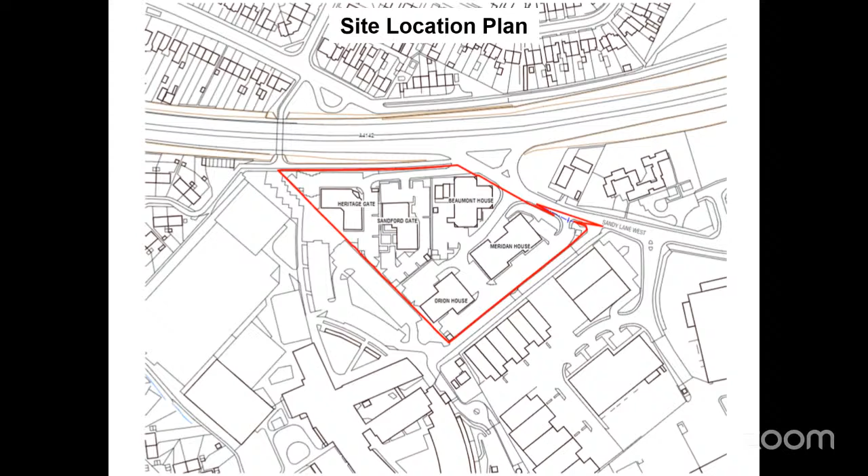The application proposes to demolish the existing buildings and erect 3 four-storey laboratory and office buildings, varying in height from 18 metres to 22 metres. Within the ground floor of one of the lab buildings, a dedicated learning lab would be tailored to the needs of local school children. A single-storey pavilion building at 4 metres in height would provide a flexible space with servery and toilets that has the potential to offer space for community workshops and events, public meetings, staff collaboration, and informal breakout space. One 3-storey demountable multi-storey car park would front Sandy Lane West and vary in height, reaching a maximum of 22 metres, including mechanical plant screen. The proposal would deliver a gross internal area of 20,730 square metres.

The multi-storey car park would be accessed by car via a partial 2-way eastern entry point off Sandy Lane West and would accommodate 299 car parking bays, with 4 accessible bays provided externally to the rear of the pavilion building. 8 visitor spaces would be provided on site. The multi-storey car park would also accommodate 280 cycle parking spaces, with 50 spaces located externally throughout the site and 15 electric scooter spaces adjacent to the external cycle parking. The multi-storey car park would also house a bike repair area, water tanks, and plant room at ground floor.

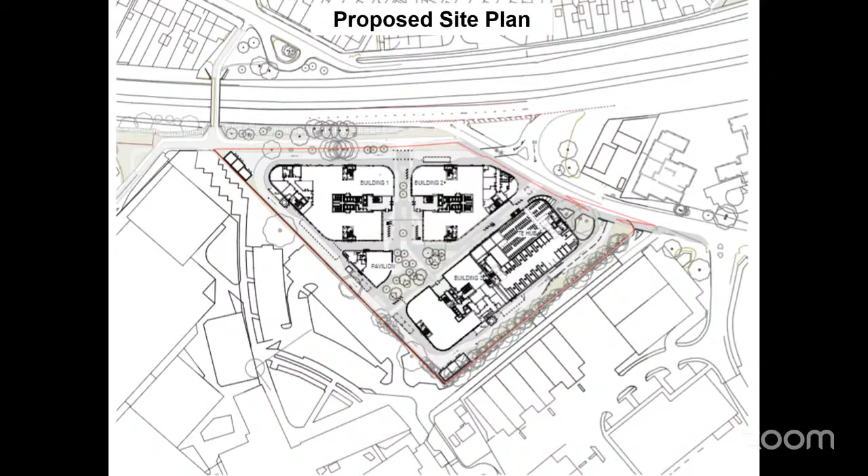The applicants would carry out improvement works and resurface and widen the cycle and pedestrian lane along Sandy Lane West and enhance lighting and widen the underpass where possible. Double yellow lines would be extended along Sandy Lane West to help avoid unauthorised parking, and 2 road humps would be installed to reduce vehicle speeds.

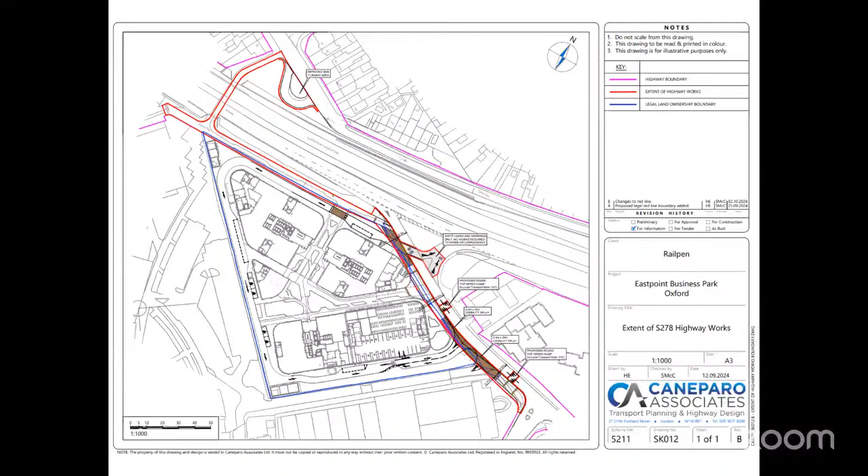In order to reinstate the 5A bus service and enhance the site's sustainability, the applicant would carry out works to bring the bus turnaround area on Long Lane back into use. These works include the removal of existing bollards, curb realignment to allow a double-decker bus to turn, resurfacing and installation of street lighting. Details of these works would be secured via a 278 agreement with the Highways Authority.

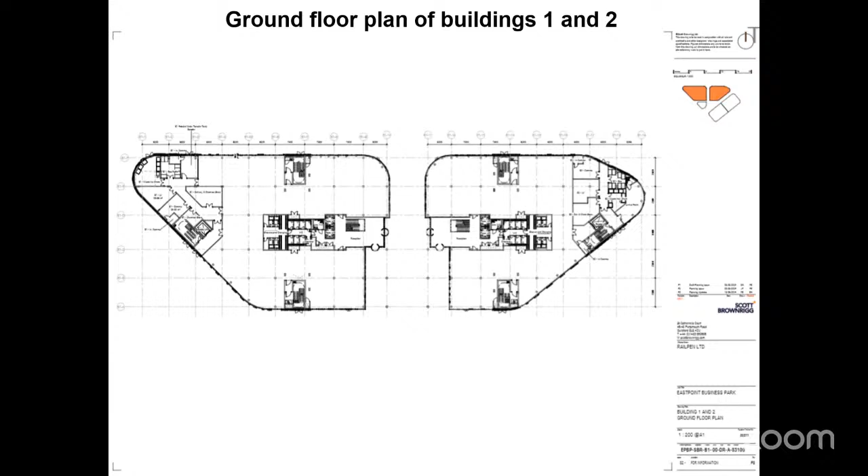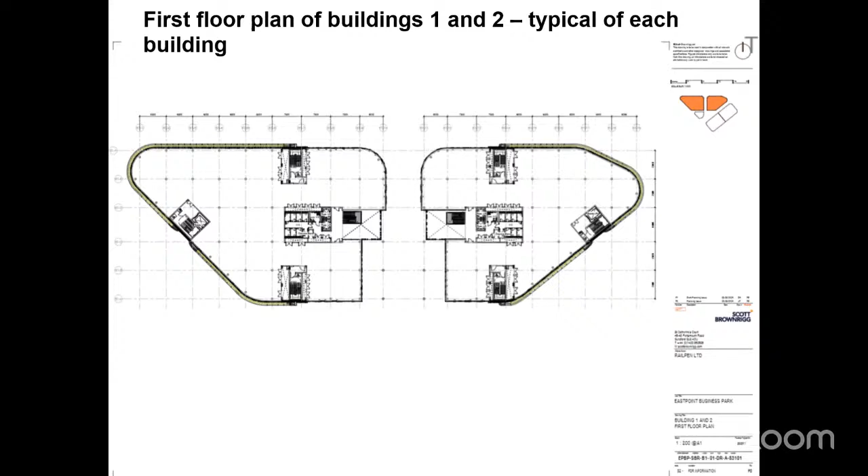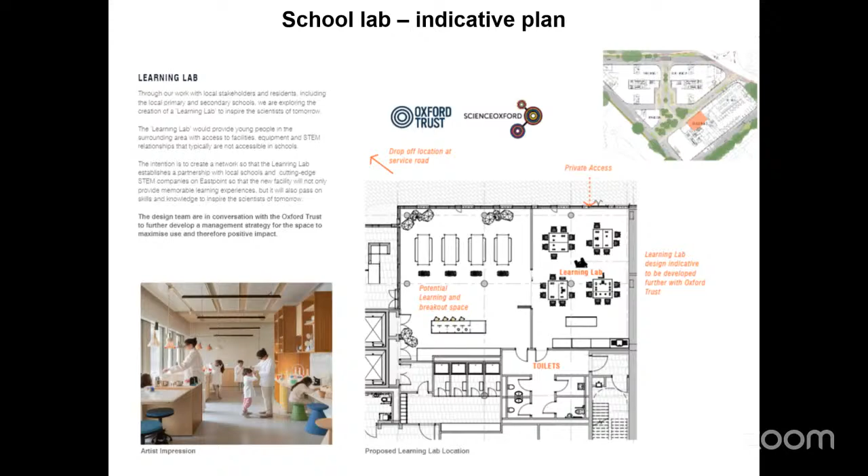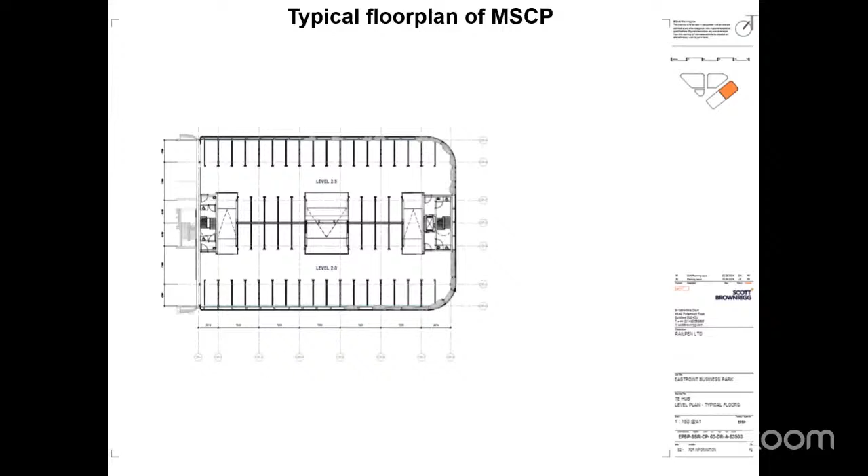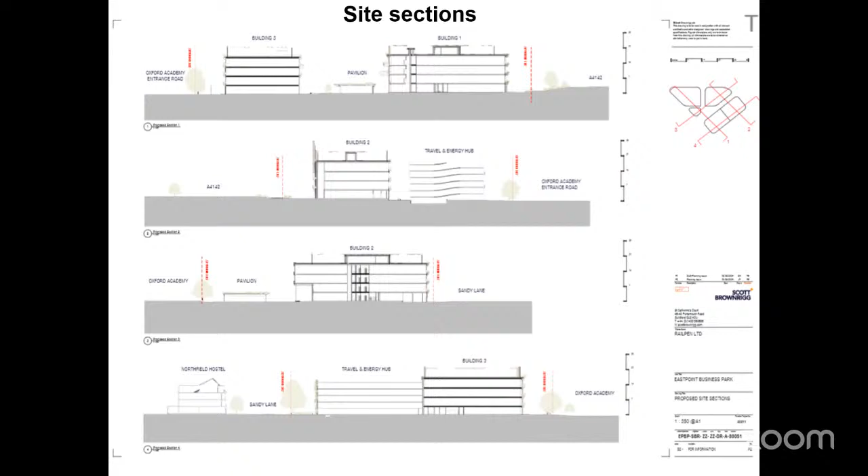This slide shows the site sections, illustrating the variance in height throughout the site. Care was taken during the pre-application process to ensure that the amenity of future Northfield Hostel residents is not impacted. Northfield Hostel is just here. And as such, the design was amended to increase the setback from Sandy Lane West and partially decrease the height of the multi-storey car park.

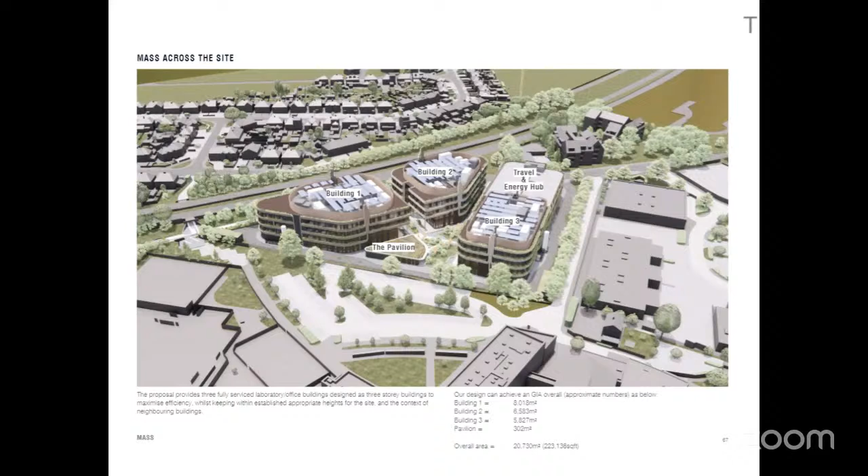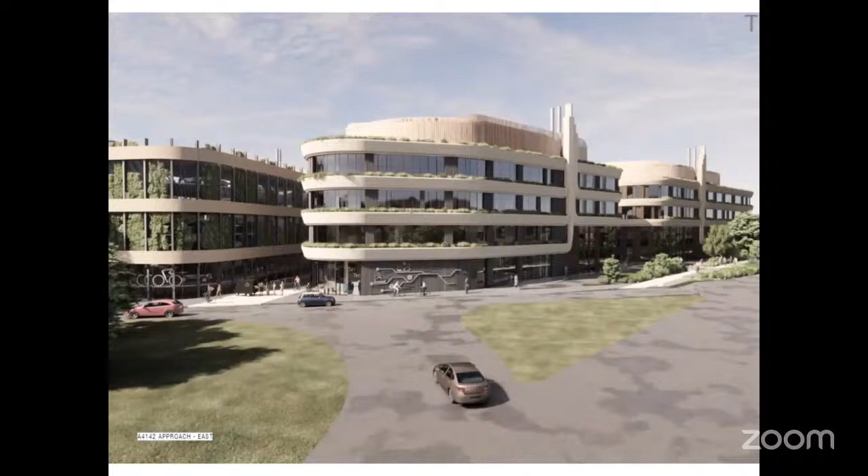The development is formed of separate buildings, which helps to break up the mass and allows permeability through the site for tenants and visitors, and enables the development to feel open rather than defensive, which is something officers and the applicant team worked hard to avoid during the pre-application process. The buildings are characterised by horizontal banding and curved corners, with the horizontal banding's significant depth enabling planting. This facade planting would help soften the appearance of the buildings, as well as enhancing the site's ecology.

The form of the flues appear as a continuation of the horizontal banding across the building, which results in a cohesive design and also works well with the curved corners of the building. Integrating the flues into the elevation design is always encouraged by officers, and it gives the lab building a strong narrative and celebrates the building's use, helping to create an identity for this new development.

However, the development would still be visible and appear as a large urban form of development, eroding the open character of the conservation area. However, accounting for the fact that the development would only be visible from part of the conservation area, the impact is limited, and officers consider the resultant harm to be a low level of less than substantial. A low level of less than substantial harm would also be caused to the significance of St George's at 31 Cowley Road, which is Grade 2 listed, and Dormercroft, which is also Grade 2 listed, as the proposal would go some way to eroding the character of the listed building settings in the same way that it would to the setting of the conservation area, in that it is less open.

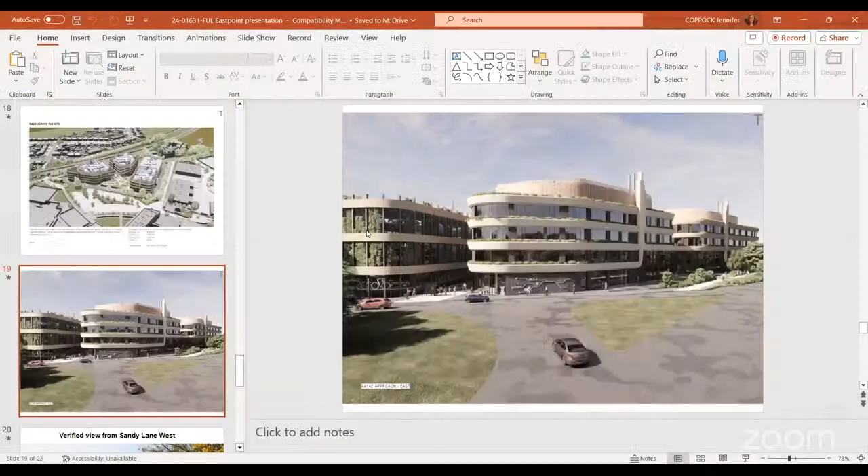We'll now move on to the next item, which is the Odeon Cinema. And again, that is Jennifer to present. Thank you. Okay, thank you, Chair. So I have one verbal update for this one as well before I start my presentation.

Earlier today, Thames Water removed its requirement to restrict occupation until sewage treatment works upgrades have been carried out. This is because the current capacity of the treatment works is considered suitable to accept the flows from the development of this size, taking into account the net additional floor space.

So the application site is located on the north side of George Street and is occupied almost in its entirety by a purpose-built 1930s cinema, currently occupied by Odeon. It's bounded to the east by St George's Place and to the north by Gloucester Green. To the west, the site adjoins the old fire station. Surrounding use classes include retail, restaurants and cafes at ground floor level, with residential and offices within the upper levels of 3 and 4 storeys.

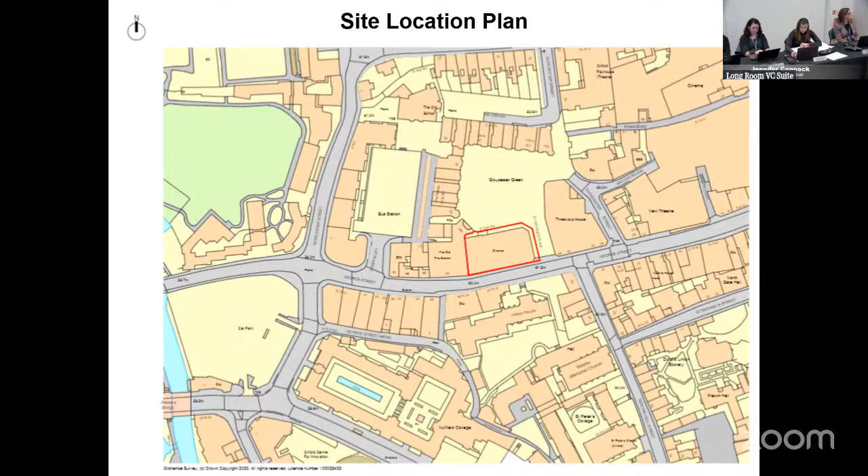The Gloucester Green bus station lies to the northwest of the application site. The site forms part of a secondary shopping frontage within the city's primary shopping area. The site also sits within the West End and Osney Mead area of change. The application proposes to demolish the existing cinema and erect a 6-storey plus basement apart hotel with a gross internal area of 6,050 square metres.

External cycle stores for the apart hotel staff and community space staff and visitors would be located to the rear of the building, fronting Gloucester Green. An external bin store would be located along the Gloucester Green frontage also. The existing substation and enclosure would remain in situ, also along this frontage. The proposal includes a seating area within the public realm, which extends around the northern and eastern elevations of the proposed building.

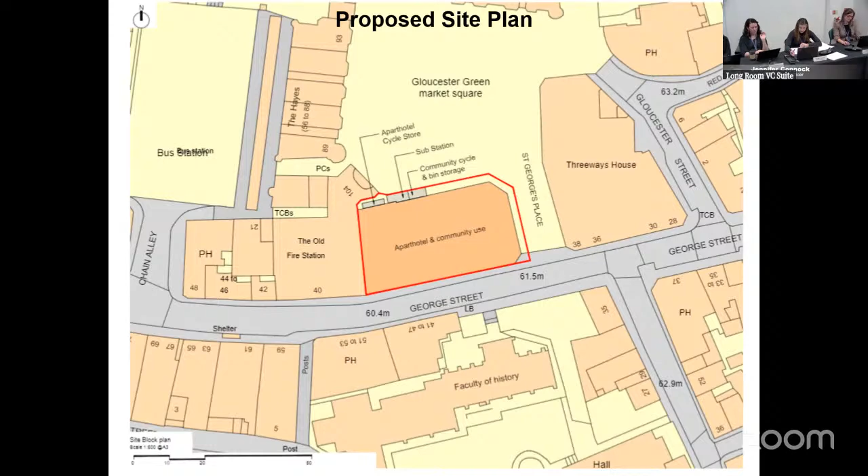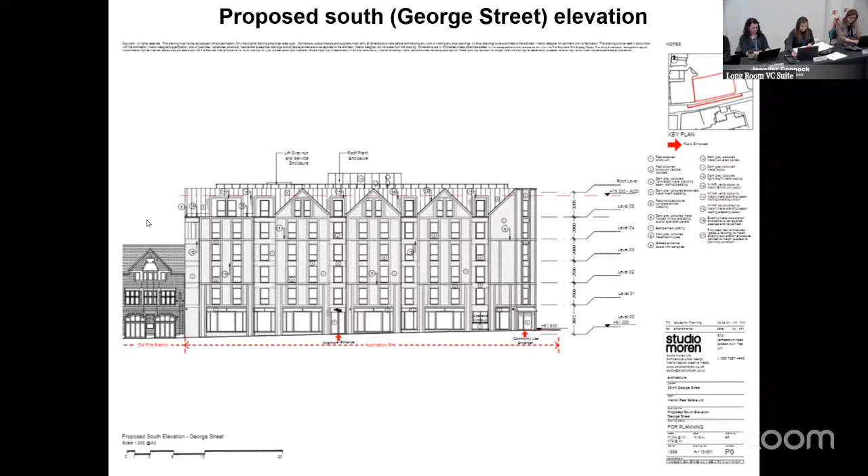The coffee kiosk hatch onto St George's Place would mitigate losing the existing building entrance along the eastern elevation, with the hatch having the potential to promote use of the improved public realm. The second entrance into the community space would be located along Gloucester Green, which is very positive, as it would further promote use of this space and enhance the public realm, as this elevation is currently blank, presenting very much as a back of house. Dormer windows have been used to add verticality to this elevation, much like the gables do along the south elevation.

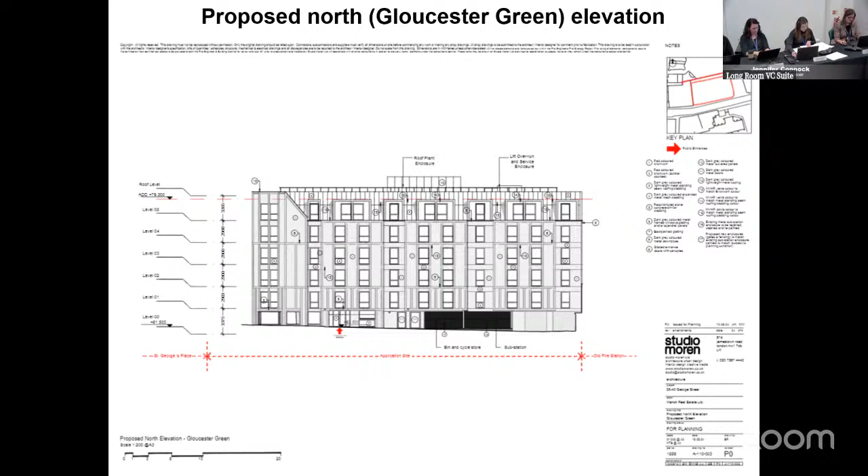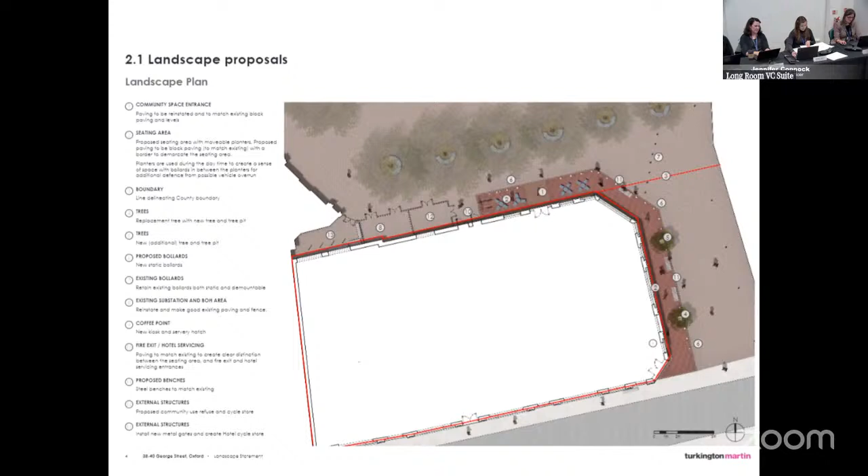Thank you, Jennifer. Now I've got two speakers down to speak in favour. If you could come forward, and if you're happy to divide your time up so that it's 5 minutes altogether, it doesn't have to be 2.5 minutes each, but as long as it doesn't exceed 5 minutes. You could use the mic, that's right, yeah.

Thank you. That's fine. I'm Andrew Heselton. I'm the development manager at Marick Real Estate. We're excited to contribute to the regeneration of this important site in the city. Our proposals have been developed with input and engagement with the local authority and stakeholders such as Highways, Historic England, Oxford Preservation Trust and the Civic Society. We've closely engaged with the surrounding property owners, local businesses and residents.

On multiple occasions, we presented our scheme at market stalls in Gloucester Green, plus holding a public exhibition at the old fire station. Additionally, there's been social media engagement, publications and stakeholder meetings, both before and during planning. This is just the start of our journey in community engagement and communications, which will continue through to completion. Just a bit about Staycity, which is a 20-year-old award-winning international hotel brand headquartered in Dublin. This scheme will be the first apart hotel in Oxford.

Staycity's approach is about the guest experience. The Staycity Wilde brand apart hotel differentiates its offering from a typical hotel, offering the best of both worlds by combining the comforts of home with the services of a hotel. Apart hotels are particularly popular with business travellers, tourists and families who appreciate having a home-like environment while they're away. Having the cooking facilities in their rooms offers guests a desired versatility and an alternative to the Airbnb offering. There is limited food and beverage offering in the Staycity Cafe, and this helps to drive local revenue to

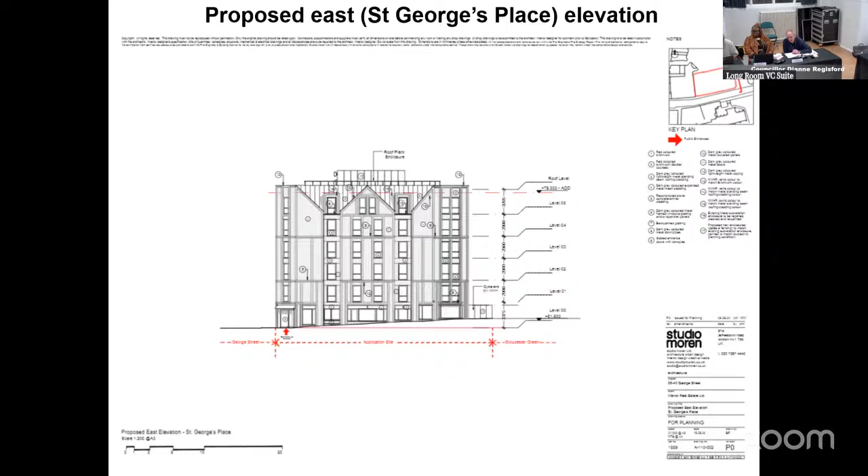The old Oxford Boys School, David. I don't know if you... No, I got that. South Oxford, I'm afraid.

So a couple of questions. The frontage that there is now, it's a question for the heritage officer really. Is there any heritage value thought to be attached to that? The stone lintels, it's quite iconic. So I'm just wondering, was that considered as something of heritage value that's being lost, to be weighed in the balance? And then question 2 was public toilets.

That's fantastic, there's going to be public toilets. We'll all be delighted about that. Just wondering, are those going to be 24-hour? Do we have a management plan? I know there's sometimes issues with central toilets. So are they likely to be 24-hour?

That's my question. Thanks. So in terms of the existing cinema, it is considered a locally designated, non-designated heritage asset. As part of the proposal, we would have the stone bas relief retained, and I've conditioned a method statement for that to be safely removed, stored, and then relocated within the community space. The exact location within the community space is flexible, but it's something that will be secured prior to occupation. And in terms of documenting the historic interest of the building, level 3 building recording would be conditioned as well. But generally it's felt that the lack of activation along George Street is detrimental, and there is a benefit to having that activation.

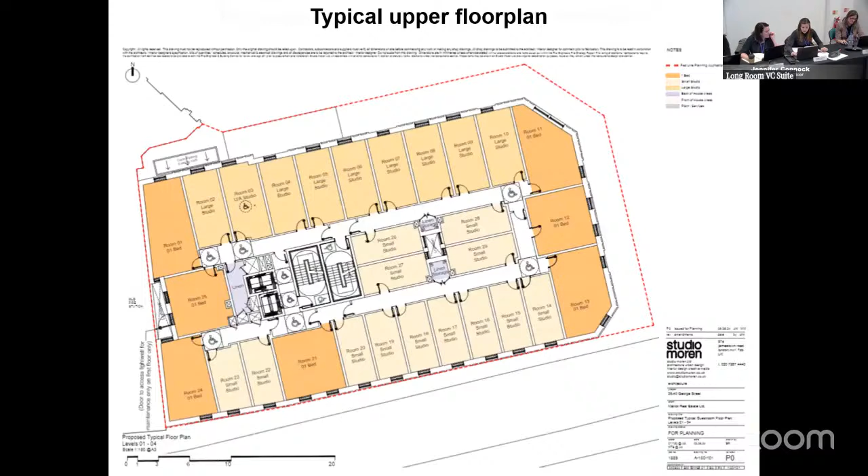Sorry, it's taking a while. There we go.

I think Dianne, did you have a question? Thanks. Yes, I just wanted to take some guidance. I was a former employee of MakeSpace and until last month, a resident at one of their buildings. So I just wanted to know whether it would be appropriate for me to abstain for this round. I'm no longer a resident. Do you think it will prejudice your decision in any way? Yes. Then I would advise that you withdraw from this and not engage in the debate or the vote. Thank you. Any other questions? Alex?

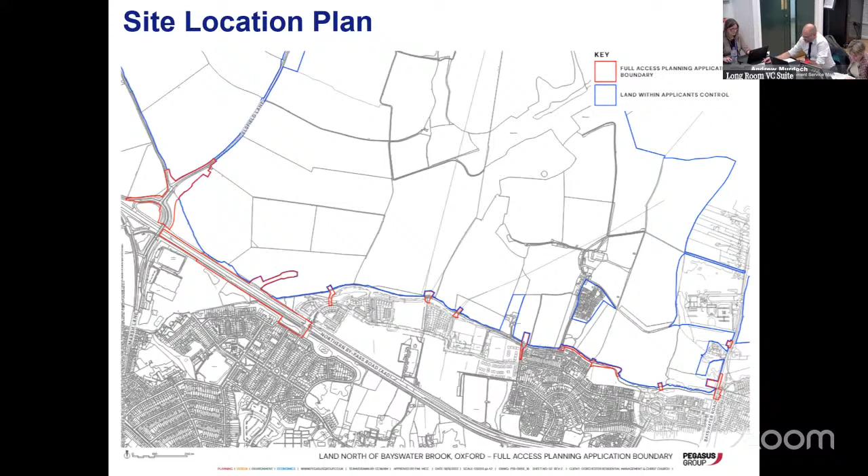So in addition to this, the applicant has gone through a significant period of discussion with the County Council, with South Oxfordshire officers and with officers from this council to try to develop a scheme of access works that allows suitable access to deal with the traffic generation, but also provides a number of high quality pedestrian, cycle and public transport links to integrate this development with developments in the city, but also provide alternative modes of transport to the car. And we'll take you through those now.

So what we're talking about in terms of the proposals is we've got the main access works here on the western end. We've got access on the eastern end, which I'll take you through. Then we've got 5 connectivity bridges throughout the development. And we've got public transport links through a linkage here on Barton Village Road and through a bus priority route off the A40. And then there's also the A40 pedestrian and cycle bridge. So I'm going to take you through each of those with some photographs, because it's quite difficult to orientate you here with main arterial routes, so I'll take you through those step by step.

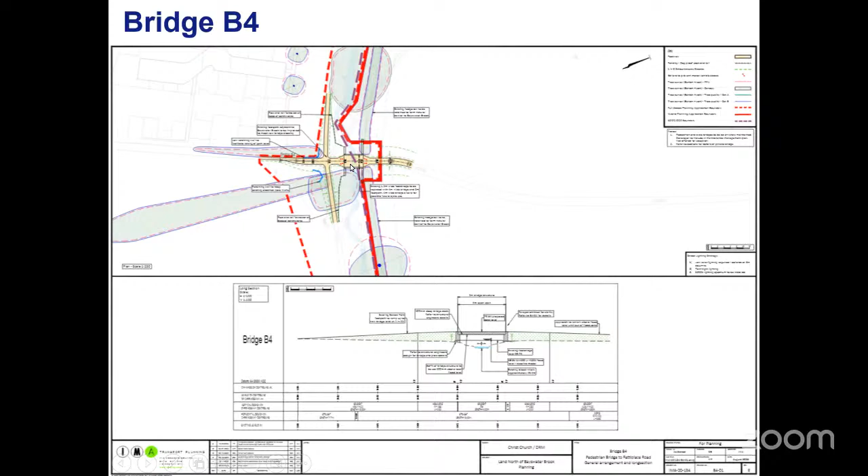The intention is to just make improvements in that junction. Again, a route across the bridge, taking the bridge out of the flood zone. So therefore improving that with some build-up works in and around here to again try to create a dry access if there are any points of flood. And again, smaller scale, but you can see the same family of bridge types.

So the cycleway will come through around here into Tags Gate, but there's also a route which we're exploring up to Underhill Circus as another route that could be used by cyclists to bring people up to Underhill Circus to be able to get access to the community centre, the parade of shops, and there are some localised works in and around Underhill Circus to provide a new bus stop.

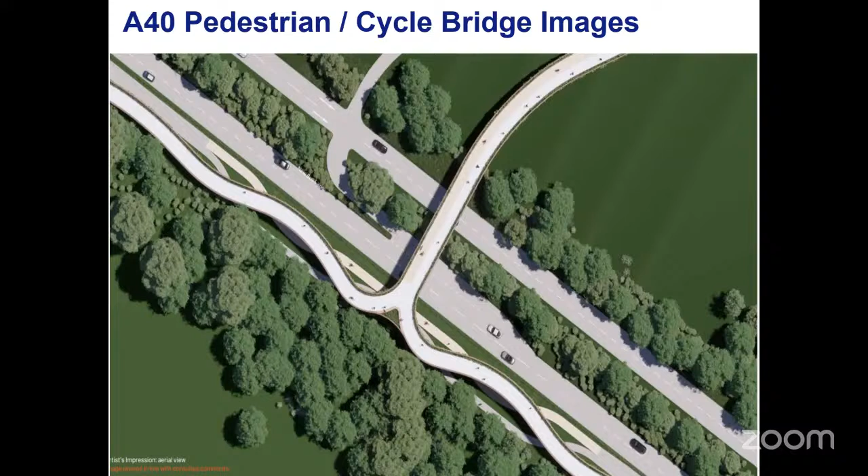But to give you some visual impressions here, one of the reasons why it was quite difficult to provide a bridge crossing for Barton Park, you can see the amount of land take that it's taken to deliver something that provides access for pedestrians and cyclists. But this is an aerial view. And again, the intention for this design was to try to provide a landmark feature that signposts the development itself, with a design bridge that would very overtly appear as a pedestrian cycle bridge to encourage use.

And it has been designed to try to maintain the cycleway that runs underneath; it's quite a well-used cycleway. And that's another view of the bridge, which again comes back to the overall points about high quality pedestrian and cycle routes to encourage use.

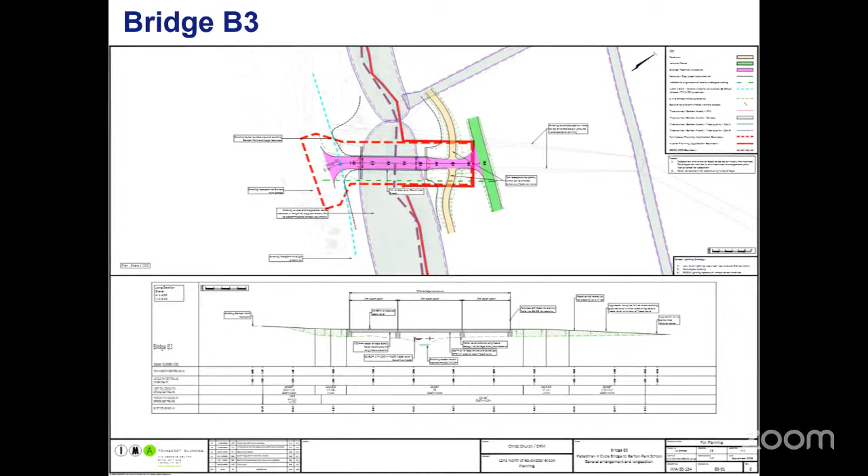It was the last one where the bus access was also. Yeah. That's it. Oh. Yeah, there you go. Could you go back one? Oh no, is it the one before? That's it. Thank you. That's it.

So, this looks like a really nice design. My only concern is, and I agree with Councillor, that I'd like to see some segregation between cyclists and pedestrians. I do think the e-bikes are an issue. I'm a little bit concerned about the winter months when it's dark. Will there be some form of illumination? And how will the emergency services access those bridges should there be an emergency on there?

Well, there will be lighting. There's been a long discussion about this bridge with the county council, so elements of segregation would be quite difficult. There is segregation, I think, going to be demarcated, as you can see on there, on the deck. I think on the ramps up, they are of a sufficient and significant length so that there is visibility, so people with e-bikes can see and have got a line of sight. But again, they're not segregated all the way through.

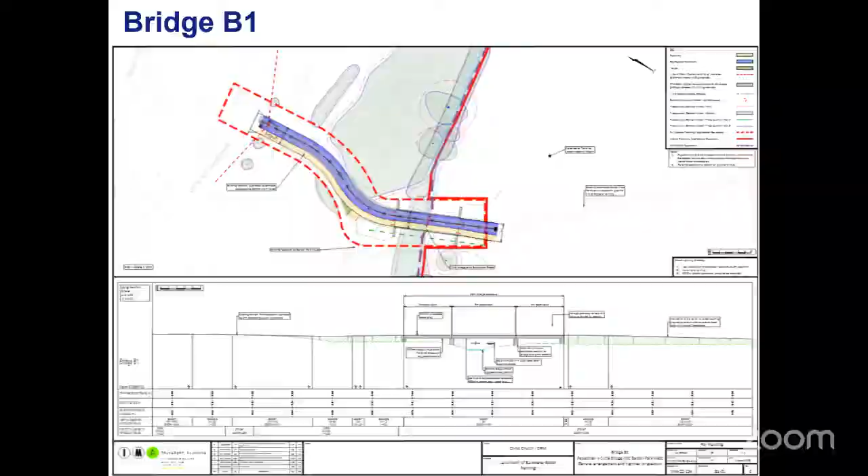Right, back to the bridges, the main bridge. And we might want to direct it to on the design choices, but I'm going the wrong way, aren't I? You are going the wrong way. Trying to remember my order in my head.

I think it's partly a design choice, but also partly to be able to create the cycle routes through and maintain them, where you're going to put supporting columns. But again, we may want to ask in a moment, but that is the intention. So it's a bit of both. It allows a bit of a design feature, but also it allows the continuation of those cycle routes. And I believe those cycle routes will be maintained to LTN compliance as we go through. Don't know if we wanted to ask the applicant to.

Yeah, so just come back on a couple of bits there. So underneath the bridge is LTN 1/20 compliant. That's been checked. Obviously, the bridge itself and underneath has been through safety audits. And the other reason for the sinuous nature of the bridge is partly design and also partly because of arb constraints around the existing trees that sit on the city side of the A40. And what about the 278s? I put those in the presentation to give you a bit of information exactly, but those are being secured through the hybrid application with South and through a Section 278 agreement.

Thank you. Altaf. Can I find out the exact location of this spaghetti bridge? The noodle bridge. Noodle, spaghetti, whatever you call it. Exact location on the A40. Is it where the Foxwell Drive junction is, or is it this way or the Elsfield side? Where is this exactly?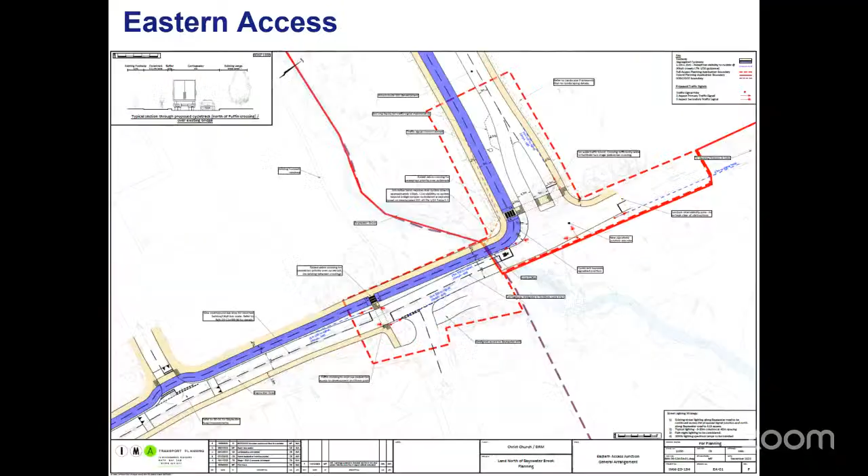Two more things. Again, I agree with Alex. I can't see why anybody would want to cycle into Tags Gate. They're going to want to cycle to the health centre and the shops at Underhill Circus. It seems pretty wide there. There's quite a bit of access, I think, at the side of the neighbourhood centre. I don't understand why we're not making that a cycle track.

And I suppose lastly, are you reassured that the bridges are not going to be a maintenance problem for us in the future in terms of cost of maintaining them?

Well, firstly, we have tried to get that as the cycle route to provide a range of choice for people. So the intention will, as I said, be for that route. I'm pointing on my screen, you can't see, can you? But here, coming from Underhill Circus down to the bridge, that will be used for cycles because we see that as a more direct route. But the idea was to retain this also and keep that as an option. It's just not been shaded that way to show that that would also be used for cycles. But that is the intention and that is the discussions we've had.

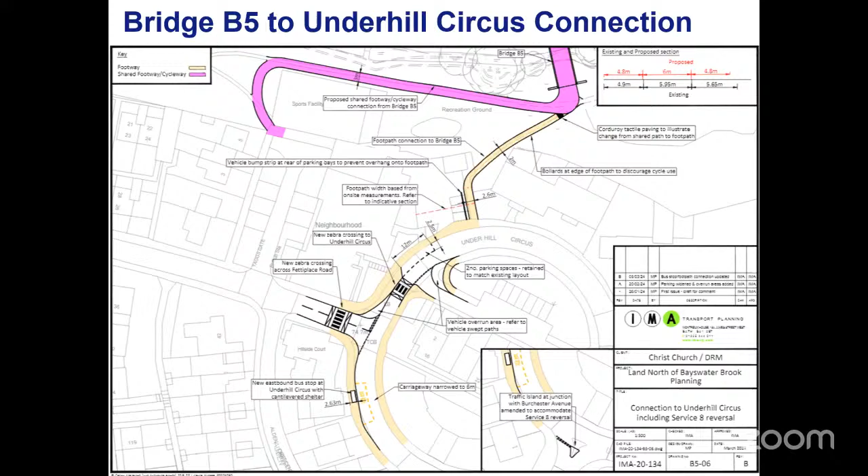And what was the other question? Oh, the maintenance of the bridges. Well, we recommend a condition be put on. I think the applicant can speak to that in terms of what they intend to do. Yeah, so we've agreed a condition relating to management of those bridges whereby the management company itself will maintain responsibility for all of those pedestrian bridges crossing the Bayswater Brook going forward.

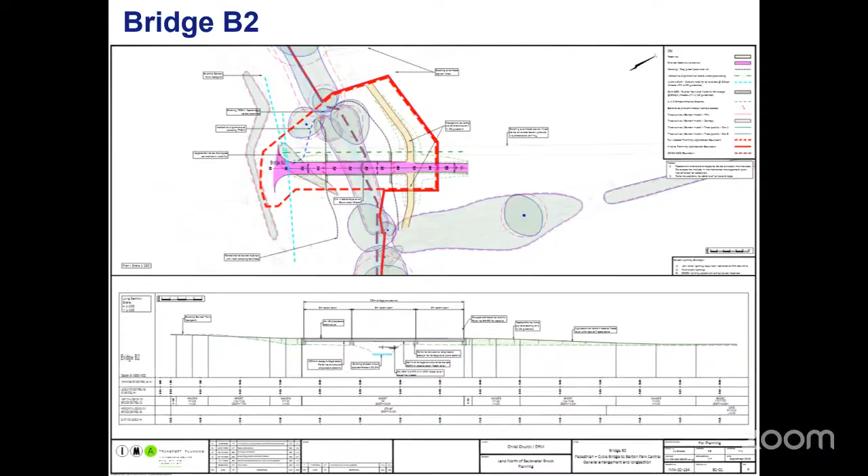Probably it is just worth picking up that at the moment, the solution for the cycle is to go round to Tags Gate. There is also a piece of work to take place with the City Council; we have contributions towards both library and GP provisions. The intention is to try and deliver those at the Barton Community Centre itself. So that may involve some additional works, expansion of that element there, which may bring Tags Gate into the development.

Thank you. Any other questions on this, Barbara? I just wanted to return to the flood risk assessment concerns from the Environment Agency, having witnessed huge flooding very recently, right on those paths where the connectivity bridges are coming over. And secondly, those connectivity bridges that are going to be created. Has anybody looked at whether the current path that exists there can accommodate the additional traffic and cycles on that width, because it's not that large a path from my knowledge.

So firstly, in terms of the Environment Agency, their initial concerns, I think, also wrapped up into the wider development and the potential for flood risk and how the brook would deal with potential flood risk from the wider development. So through the process and the modelling that's been done for the main hybrid application, the Environment Agency was satisfied that the modelling work, the drainage work, and the mitigation measures in the flood risk assessment would alleviate any concerns they had.

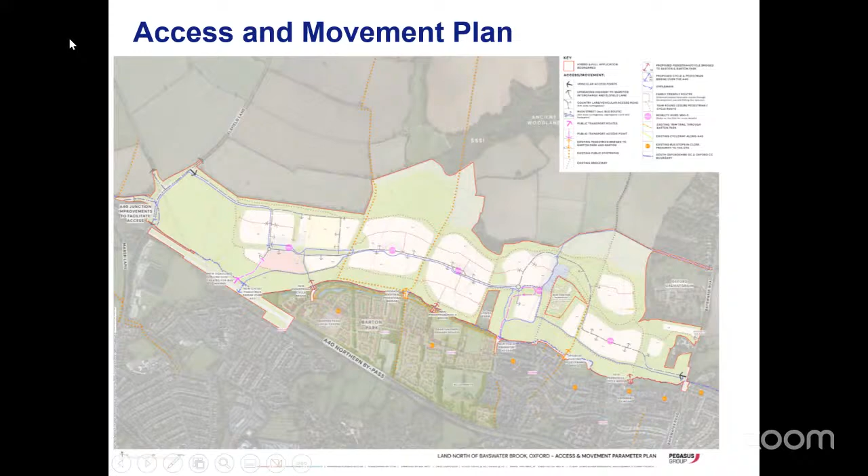Okay, so with that added as an informative and the conditions together with the verbal conditions, can I see all those in favour of the officer's recommendation? 1, 2, 3. That's unanimous, isn't it? Yeah. Okay, thank you. Thank you for coming along and answering questions. Okay, thank you. Oh, yes, please. Yeah, go on.

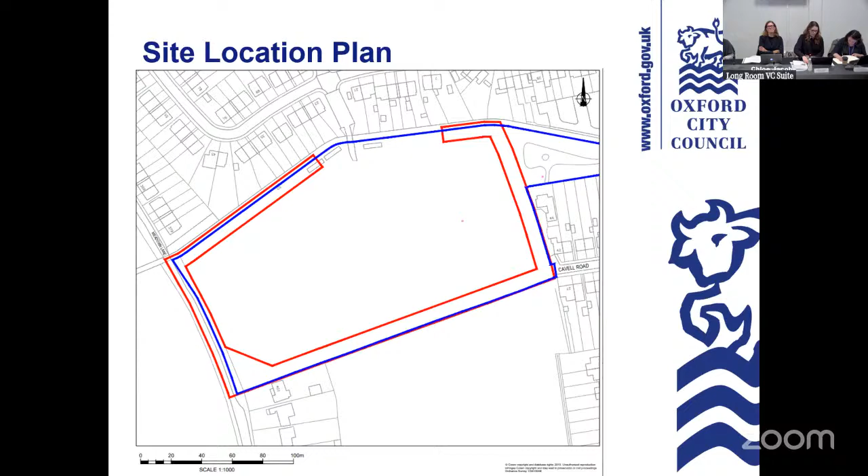The application site relates to an area of public open space which is used for sports and recreation. The site is currently home to Donnington Football Club. It is bound by trees, including a strong mature tree line which runs along the western boundary along Meadow Lane. The surrounding site is predominantly residential with Cavell Road to the east, Meadow Lane running along the western boundary and Freelands Road to the north, and Boundary Brook runs along the north of the site.

To the south of the site is Iffley Academy playing field, and as you can see from this aerial view, there is an existing desire line which cuts across the field from the existing entrance at Cavell Road to the existing entrance at Meadow Lane, which has reduced the ability for the field to be used at its full purpose for its football club.

The proposal seeks to install a 3-metre wide shared footpath and cycle path which will run along the southern edge of the site, connecting the existing Cavell Road entrance to a new entrance that is proposed along Meadow Lane. By formalising a new path, the proposal seeks to mitigate and remove the existing desire line that cuts across the field, thus allowing the site to improve and increase its use for the football club.

The proposed path would be a flexi-paved surface in a Stone Age bronze colour, which is considered to be acceptable in design terms. The path would be lined either side with luminescent discs at 2.5 metre intervals. Details of these discs have been provided and these are considered to be acceptable in both design and amenity terms. This is the existing access at Cavell Road. These are the existing desire lines which cut across the field and the football pitches.

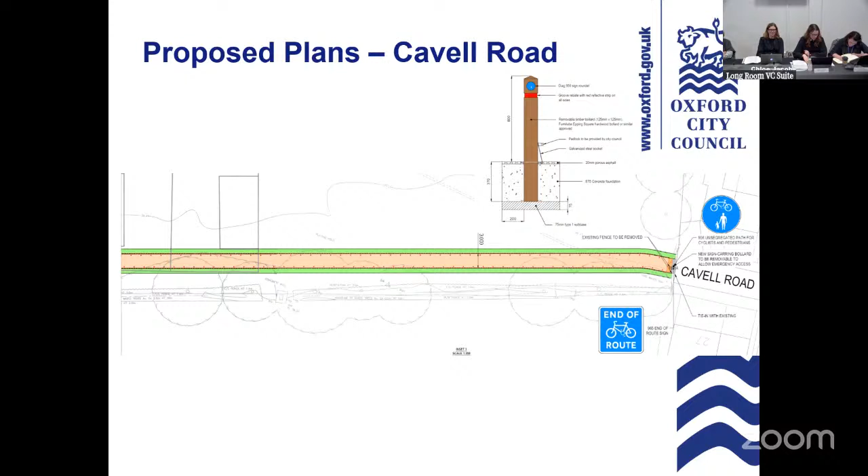At the Cavell Road entrance, the proposal seeks to remove the existing fence and install a removable timber bollard which will allow for emergency services to access the site in event of emergencies. It also seeks to install suitable highway signage, and the proposed works are considered acceptable in terms of design and are typical for what you'd expect to see for a footpath and a recreation ground, and there'd be no neighbouring or highways impacts. This is the existing access from Meadow Lane, and again you can see the desire line which connects to the existing access at Cavell Road.

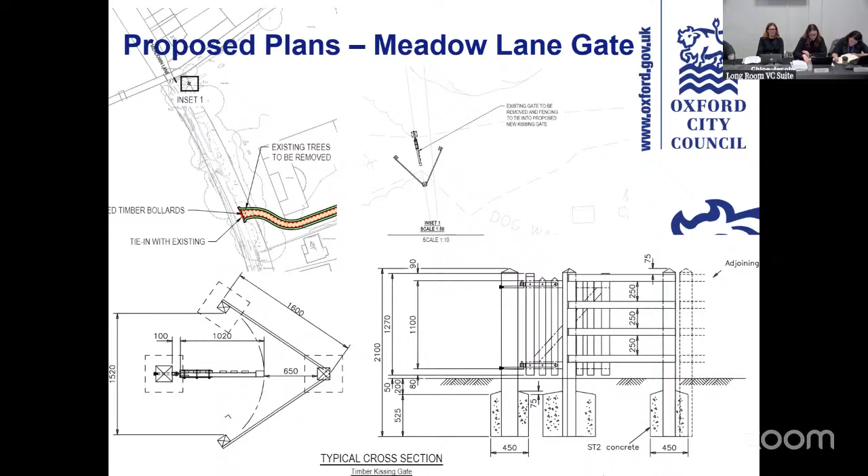At the existing entrance on Meadow Lane, the proposal seeks to remove the gate and proposes to install a timber kissing gate with associated fencing. Again, this is considered acceptable in design and amenity terms. To the south of Meadow Lane, the proposal seeks to create a new entrance. To facilitate this new access, a number of trees are proposed to be removed. This equates to about 4 larger trees and a number of smaller stems.

This entrance would feature a chicane and staggered timber bollards to help reduce the speed of cyclists. And these bollards would be staggered such that they would allow for wheelchairs, pushchairs and cargo bikes to utilise the path. This is considered acceptable in design and amenity terms and in regards to highway safety.

This is an image of where the proposed access is going to go, and it shows the strong mature tree line that's proposed to be removed to facilitate the new access. There has been huge public concern in regards to the loss of the trees. It has been confirmed that no category A or B trees are to be removed and no veteran or ancient trees are to be removed as part of this section of trees.

And this is the same as what was previously considered by members of the Planning Committee in October 23. The applicant has confirmed that they would seek to retain as many trees as possible and will only be removing those that are necessary to facilitate the development. It has been demonstrated that the works cannot be achieved without the loss of some trees. And in terms of quantifying the loss, we have looked at it in terms of the canopy cover, and officers have calculated that the approximate canopy cover to be lost is about 275 metres squared.

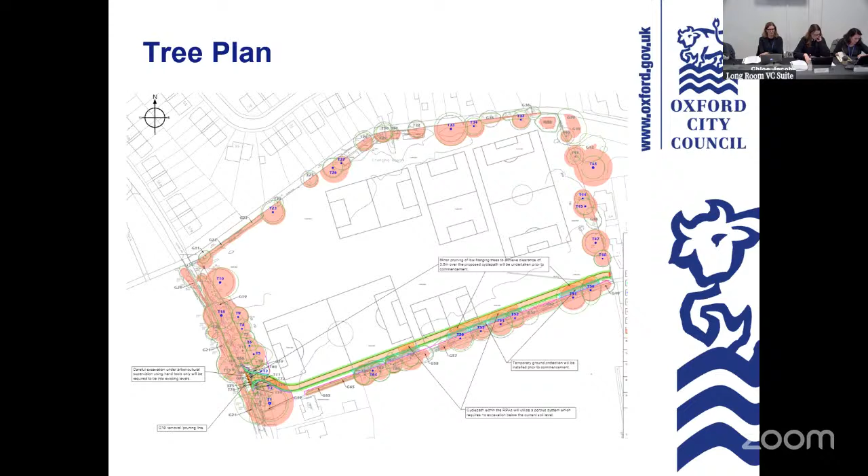And then in terms of the on-site landscaping, the proposal will seek to plant 7 new trees on the site. We now have details of those trees, and these would include 6 field maples and 1 silver birch. These trees are to be planted in open areas, meaning that they have space in which to grow to their full size potential. On the basis of number of trees, the species and the location of the tree planting, officers are satisfied that there will be a net gain in canopy cover within the site. And as the proposal is considered to yield a net gain in canopy cover, it would enhance the overall appearance of the park by the placement of trees in locations where there are currently large gaps in the tree cover.

Off-site, so in order to secure a positive biodiversity net gain, off-site planting is required and therefore proposed. Significant changes have been made to the proposed off-site planting at Greyfriars School, with the vast majority of the off-site planting that was previously considered at committee in 2023 being omitted. The off-site proposal now includes a small area of scrub planting and grassland enhancement, such that the overall score of the development proposal in terms of biodiversity net gain would be a net gain of 0.10 habitat units. There is a large reduction in the number of hedgerow units from what was previously considered, with only 30 metres of new planting proposed, such that the overall score would be a net gain of 0.02 hedgerow units.

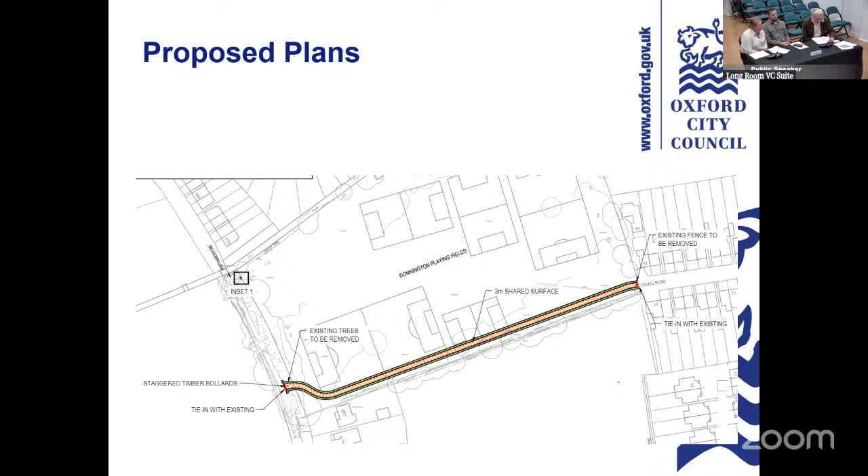Hi there, I'm Tim Foster and I'm representing Donnington Football Club. We're a volunteer community club with the cheapest membership fees across Oxfordshire. We play on the Donnington Rec and we serve the local area. We currently have 13 teams, 200 players, 140 boys, 60 girls, ages between 6 and 17.

Our limitation currently is pitch space, meaning we lack a number of pitches. Also, we don't have the area available to have a full-size pitch, which means any of our 15 plus teams have to play elsewhere. We have a waiting list of over 50 players, including a women's team en masse that would like to join our club and play, but unfortunately we don't have the capability to house them as yet.

In terms of this proposal, the only option that satisfies the need of the club is the one that removes diagonal access for bicycles across the field. If the aims and objectives of the cycle path include removing the desire line to cut the corner across the field, then the only option is a straight path along the south edge of the field with a new entrance on Meadow Lane and cycling restrictions introduced to the existing northwest Meadow Lane entrance.

A straight south side path is the only solution that will remove the diagonal bike rut. If we could remove that diagonal bike rut, it would give us 30% more pitch area, which would mean we'd have room for 3 more pitches, allowing 6 extra teams, 100 more players, and approximately 70 more families interacting locally.

The worst case scenario for the football club would be an L-shaped path with existing entrances and exits left open to cyclists, because not only would we lose space to the creation of the path, which would impact 3 of our current pitches, but also, and maybe more importantly, any cycle path pushed to 2 edges of the field with a right angle corner, ultimately leading to a very obvious diagonal shortcut, would only lead to a bike rut reappearing.

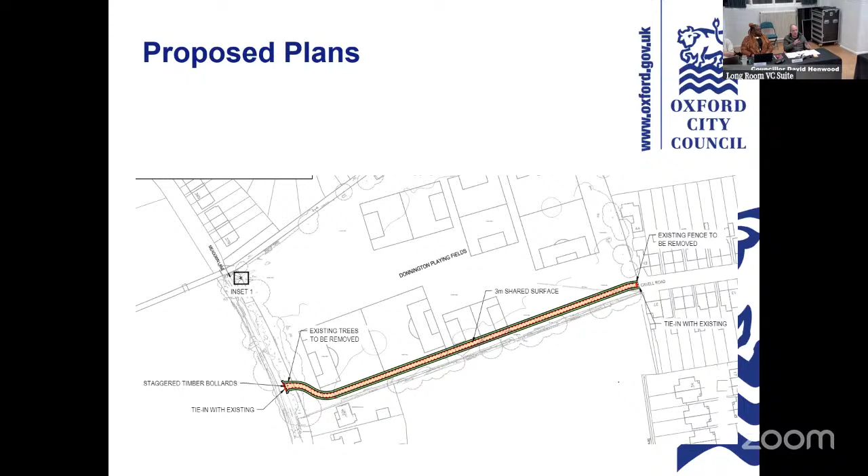Oh, okay, thank you. I think one of your biggest concerns is the current desire line going diagonally across. And I understand that the gate at the top on the Donnington side, that will close. So that would create that straight line that you would like to see. If the Meadow Lane entrance was developed, would that not create another desire line going through the football pitch to Arnold Road? It's a good question.

I know it's in part of the proposal. Maybe what's not included in here is there is already an entrance on Meadow Lane, which isn't drawn on this picture.

And actually, if you look at that picture there, you can very obviously see the desire line from Cavell Road to Meadow Lane. Considering there's an open exit in that northwest corner on Meadow Lane and on Arnold Road there is an exit, albeit it's a closed exit, so cyclists can't go through that one at the moment. There's no evidence in terms of a bike rut that any cyclists would want to go in that direction.

So whether it's because actually there's no demand to go to Arnold Road because most people cycling would cycle down Meadow Lane and ultimately maybe head towards the river or into town rather than across to eastern parts of Oxford, or whether it's because the Arnold Road exit is a closed exit for cyclists, we don't have any worries of that at all. And to be honest, if we did, we wouldn't be supporting the proposal.

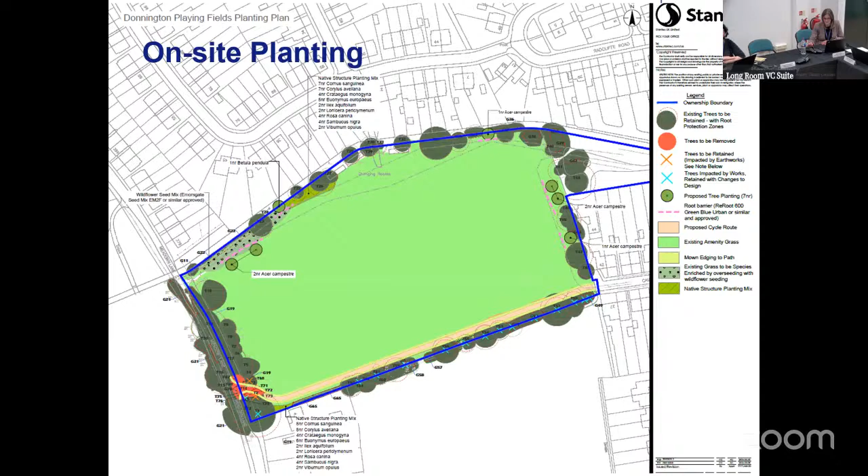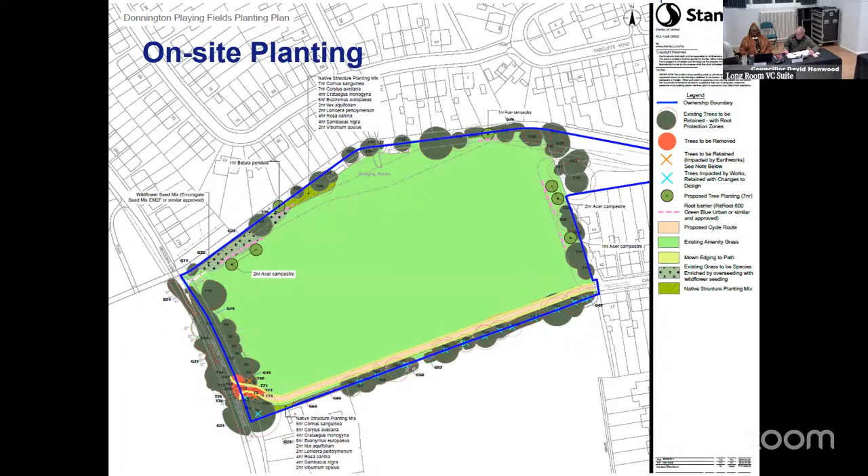Well, I think that actually is getting closer to my point, because if you count the group of trees as stems, are you also counting their canopy cover as well? Because that will have an impact on how you assess the biodiversity net gain on it. So, I mean, I'm struggling because the report says a group of trees. It doesn't say stems, it says trees. So just to clarify, the report talks about the canopy cover that's being lost, sets out the percentages being lost.

Yeah, I'm not sure if canopy cover is the right way to evaluate the net loss on the area, because I haven't seen in the report what the net gain would be on those canopies that would be planted outside of the site on Greyfriars School. That's a statement rather than a question, isn't it? Yes, it is a statement. It's not a question.

Yeah. I've got two questions. I would observe that willows are by definition multi-stemmed trees, and depending on what they've done, they could all be the same tree. But somebody needs to do a DNA test to find out, I guess.

The questions I had, two questions, and I appreciate you may not be able to answer one, but it may be one that the applicant might be able to answer or might not, depending on how many football pitches he's aware of. So the question I wanted to ask officers: as you will be aware, a lot of this rests on the definition of the first test in policy G7 in the local plan. So nothing to do with the NPPF, nothing to do with anything else, just policy G7.

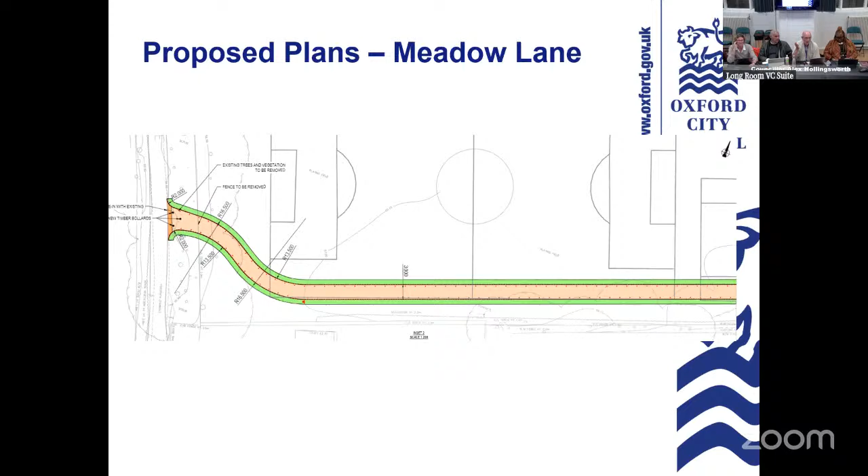For me, when we debated this last time, the issue was around that first test in policy G7. So to be completely clear on my views, I would very much like a cycle track across here. I would like it to be made of something that's not mud, which this isn't. It's got a good surface, just like the one that goes around Croft Road. And I would like the football pitches to not have a massive rut diagonally across them. You can see quite what an effect it's having on some of the visuals. You could get a whole load more pitches on there. There's a satellite view on Google Maps, which really rams home the point. So completely sympathise with the applicants, completely support the notion of the cycle track across there.

The difficulty I have with this is the feasibility test in G7. I have not heard a convincing explanation. I heard an explanation, just wasn't completely convincing, from the football club as to why this cycle track has to go in the direction it does and go out through the exit in the bottom left-hand corner of that slide and not carry on round just like the one in Croft Road does. And as the ward councillor says, the one in Croft Road, cyclists use it. They don't cycle across the middle of the grass. Yes, some people walk across, but they don't cycle across because there's a nice solid piece of track to go on. So I think what you would get if you laid it round is people cycling around the edge of the field, so you would no longer have the rut and you would no longer lose the trees.

The number of trees, I mean, we had a slightly fruitless debate, which ignored the fact that willow trees are multi-stemmed, so they're inherently difficult to count anyway. And as I said, they could all be one tree, for all we know, if they go back far enough. The issue though is the reasoning given for the choice of route through the trees out onto Meadow Lane in the southern corner, rather than going round to the existing entrance, which would involve probably zero loss of trees: is the feasibility test passed? And it wasn't for me last time, and it still isn't. I still don't understand why the application doesn't go round the rest of the route.

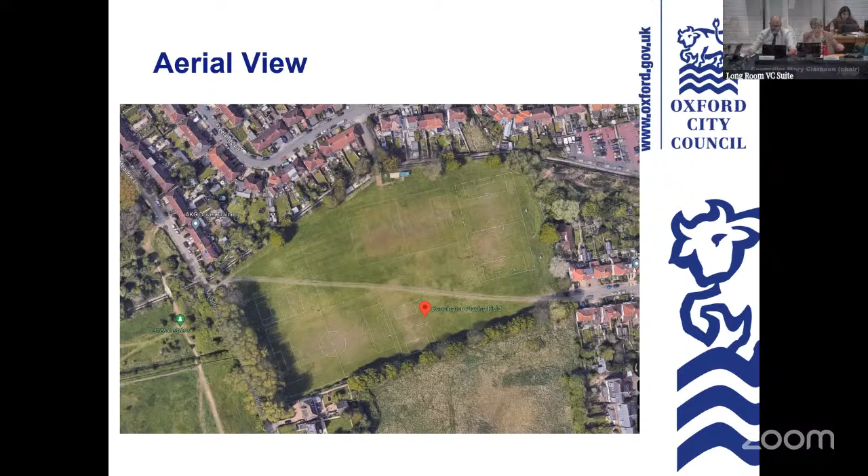Second. Yeah. Proposed on the table to accept this, and this is seconded. Can I see all those in favour of the application? And all those against? Two. And one abstention. Okay, so that is now carried. I'm now going to invite Councillor Fairweather to take over to deal with the last item and the minutes.

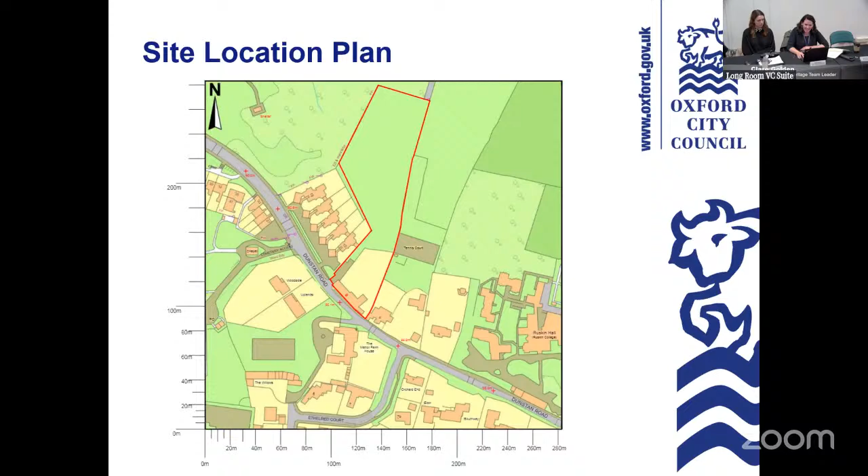This follows an application that was taken to the last committee on the 17th of September, which was the planning application. It's for a small single-storey rear extension and some internal works, the listed building, hence the listed building consent application. The reason it's coming to committee, as we know, it's in Councillor Clarkson's property. So as I've mentioned, it lies in the Old Headington Conservation Area. It is opposite another listed building, so it's in the setting of a Grade 2 listed building. So we're looking at 2 designated heritage assets, the conservation area appraisal and the listed building itself.

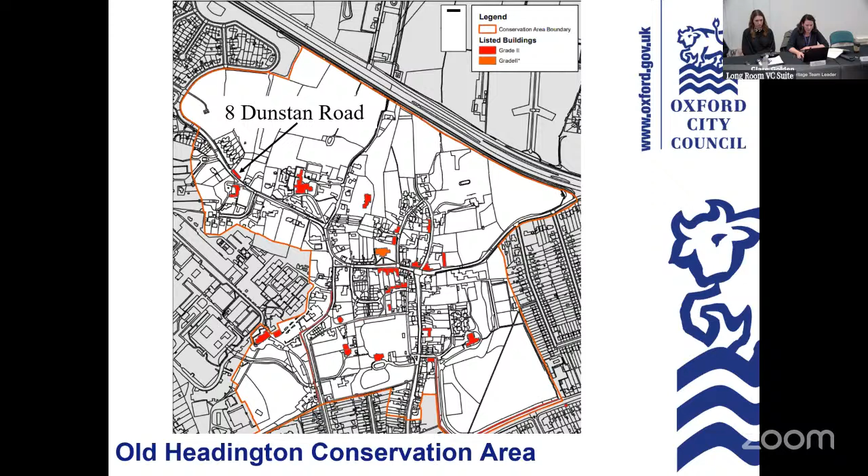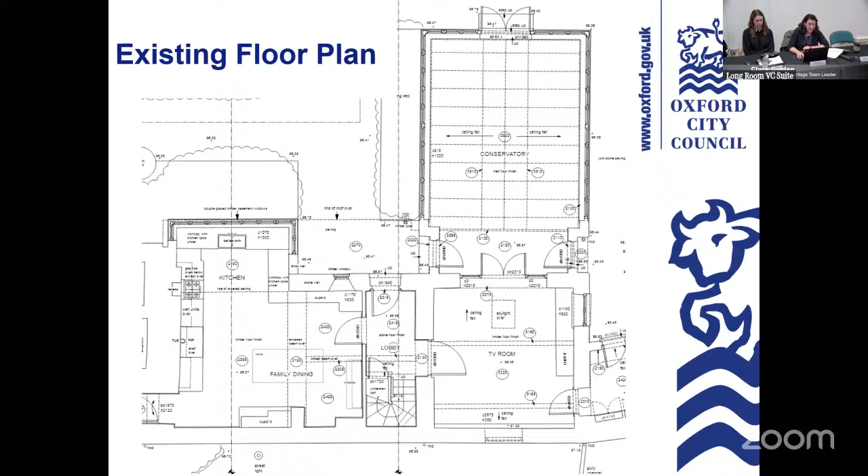These are some plans of the existing floor plans on the ground floor. And just to summarise the internal works, although we have seen that quite a lot of the fabric in this part of the building is modern, there are some remains. We would be looking at converting an existing doorway into a window, creating a new doorway into the TV room, rounding off that corner where the porch is and levelling up the floor to meet the existing. During the course of the application, we asked for a phasing plan just so we could understand the historic fabric, and we concluded that the areas that will be impacted are of low significance, to the point where the level of potential harm is no harm. So we are recommending approval of the listed building consent application, subject to the conditions proposed. Thank you. Thank you.

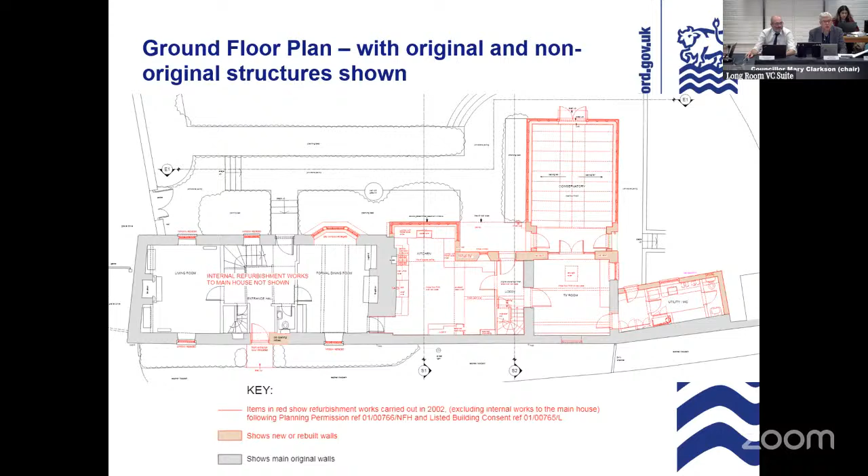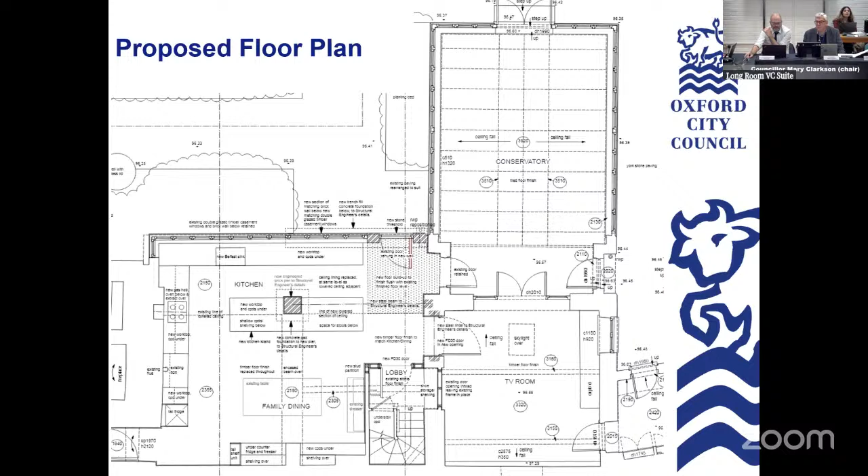So let's go on to questions. Has anybody got any questions about this proposed development? I don't see any questions. So has anybody got any comments they'd like to make? I think it's an excellent report, and having gone through the detail of what's going to be done at the last planning committee, I feel sufficiently familiar with it that I am prepared to propose that we accept the officer's recommendation and vote to approve this. Seconded. So we have a proposal on the table to accept the officer's recommendation, and it has been seconded, so I think we'll proceed to a vote. All those in favour? I think that's unanimous. Thank you very much. So the officer's report has been accepted.

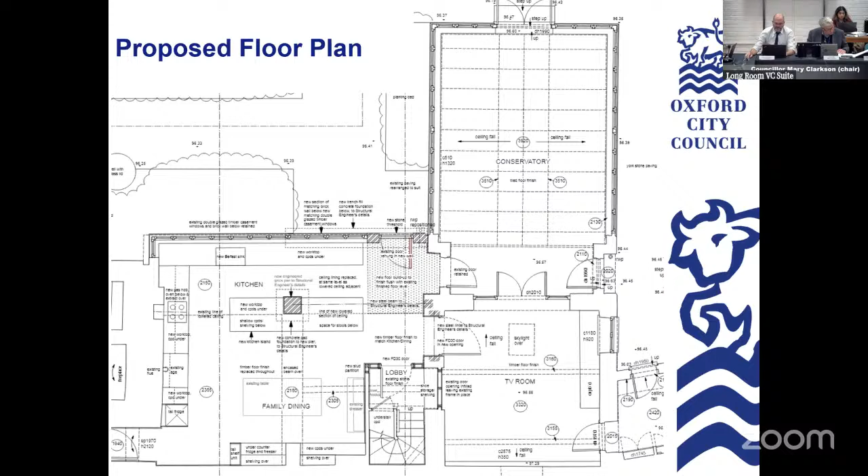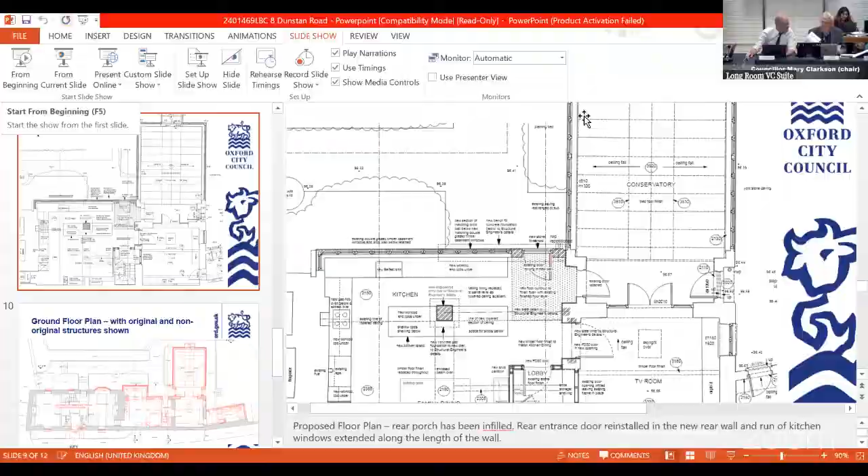Just follow on to the next item on the agenda, which is the minutes of the last meeting. This one doesn't seem to have page numbers on it, but I'll read out the items. Item 28, any comments? Item 29, any comments? Item 30, item 31, item 32, or item 33. Okay, so I think that means we can approve the minutes of the meeting of the 17th of September.

Forthcoming applications, which are listed at the end of the current agenda. Has anybody got any comments about them? Noted. Thank you. And dates of future meetings. Anybody want to mention anything about that? Okay. In that case, we will note the dates of future meetings and end this meeting. Thank you all very much.